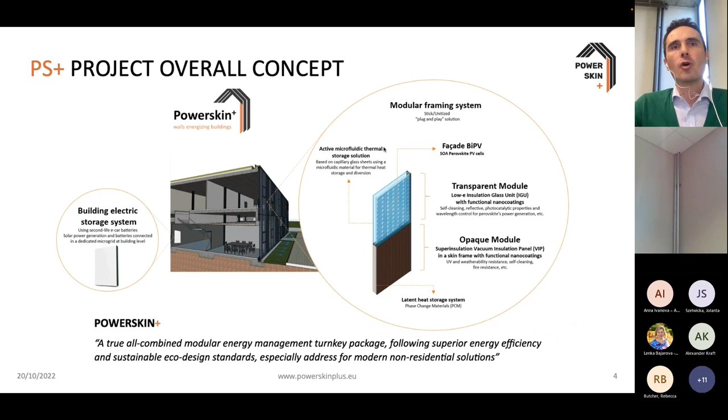This is a sketch that I normally present when I want to let people know what we are doing in POWERSKIN. So basically, we are working with curtain wall facade systems, and we are developing these different transparent and opaque modules and mixing them with what we call add-ons if we want to have a superior efficiency or a superior energy saving solution. So we want to be an all combined modular energy management package towards energy efficiency, but we are also trying to tackle those issues with sustainable eco design standards, especially addressing non-residential solutions, but actually this can be tailor-made for other types of buildings, including residential ones.

So the main key objectives of the project. We are trying to generate these hybrid enabled systems with multifunctional add-on features for curtain wall solutions. And one of the biggest objectives of the project is to demonstrate this holistic facade solution in an operational environment, which is actually what we are starting to do right now, trying to pave the early paths for future exploitation of the project outcomes. So we are trying to provide the retrofit market with this highly adaptive multi-case energy efficiency and management system. But also we are looking quite sharply at new buildings as well.

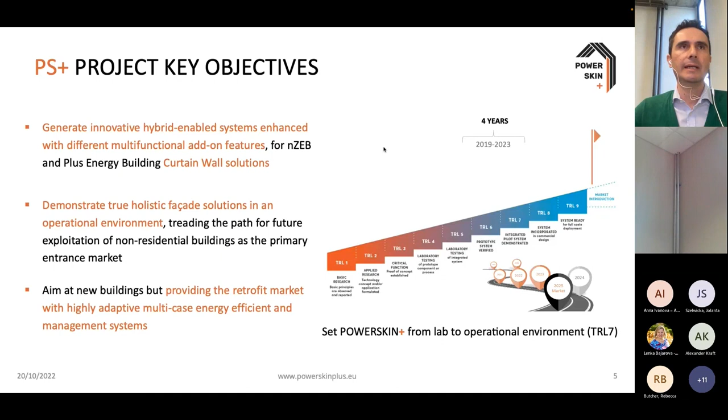So basically, we want to take POWERSKIN from lab to operational environment. So at the end of the project, we will finish most of our developments at TRL7, although there are already some modules and some elements that are already in the market. So some are very close to the market and others already in the market.

The project methodology. So this is a very typical slide of the different work packages of the project. Basically, we are trying to develop different KETs, key enabling technologies, all mixed in a piloting program. So we are dealing with super insulation elements. For the transparent elements, we are working with IGUs, and for the opaque systems, we are working with vacuum insulated panels as the main insulation element of our modules. We are also combining this with nano-enabled coatings, with active and passive phase change material heat storage elements, and microfluidic thermal storage materials for the transparent units.

And we are also combining our systems with solar energy harvesting components based on perovskite solar cells, both for the semi-transparent and opaque modules. And in the end, trying to get the maximum performance out of these energy harvesting solutions with the help of electrical building management systems supported by second life lithium-ion batteries, recycled batteries coming from electrical vehicles.

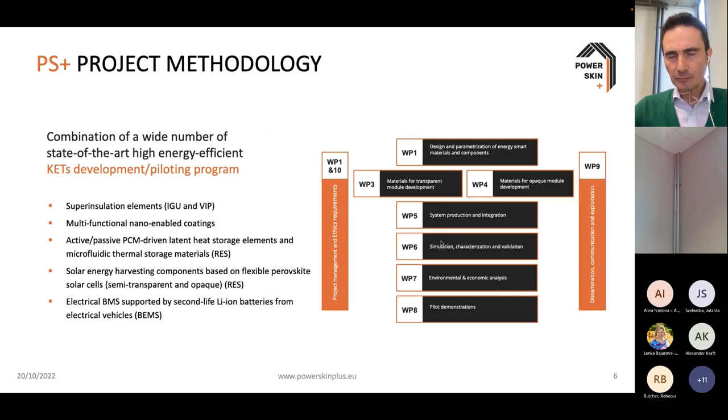So as Maria told about PLURAL, we also have a work package dedicated to system production and manufacturing, and how to integrate these different opaque and transparent elements in a framing facade system. We worked in different work packages for the transparent and for the opaque, and then we integrate all of these elements and add-ons in production, and after simulation, characterization, and validation, and the environmental and economic analysis, we intend to do what we are doing right now, which is starting our pilot demonstration of the solutions that we are tackling. So just to provide you a notion of what our transparent modules and add-ons are.

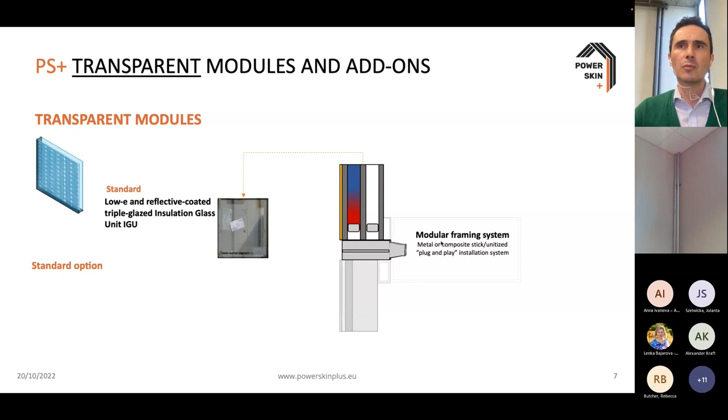So basically, POWERSKIN starts with the standard option. The most economic option will be the standard one. It's a typical triple glazed insulation glass unit, IGU, that we designed to work in a typical modular framing system, either a metal or a composite framing system, which can be a stick or a unitized plug-and-play installation system. This is the standard, so the minimum required for any type of energy efficiency.

In the premium options, we start including layers of different solutions that can enhance the performance of the facade of the building. We call this the premium option, so basically, we use functional nano coatings on these triple glazed insulation glass units for self-cleaning, anti-reflective, also for photocatalytic properties, and wavelength control for PV power generation, which I will talk about a little bit later on.

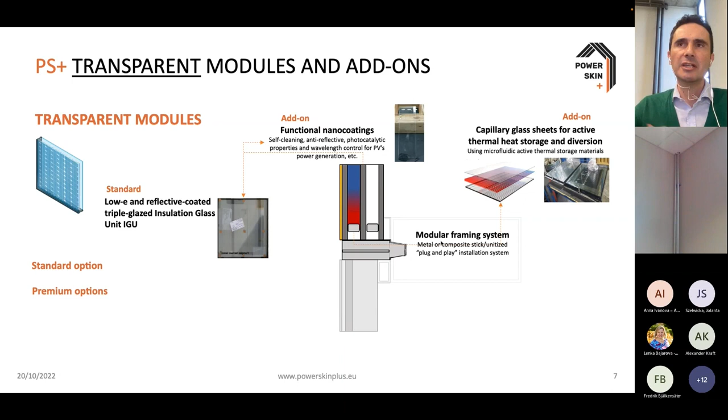Then we also have an add-on that was developed by some partners of POWERSKIN, derived from a previous European project, which are these capillary glass sheets for active thermal heat storage and diversion using microfluidic active thermal storage material. So basically, this is a fluid that is pumped inside these thin channels in the glass pane in the triple glazed IGU that removes heat and recovers this heat, for instance, to be used in the heat recovery system of the building.

Then we also work with facade building integrated photovoltaic cells. We are not using silicon ones. We are working with perovskite PVs with the help of a partner of POWERSKIN, which is Saule Technologies. And we are developing both semi-transparent and opaque perovskite PV cells to be integrated in our modules.

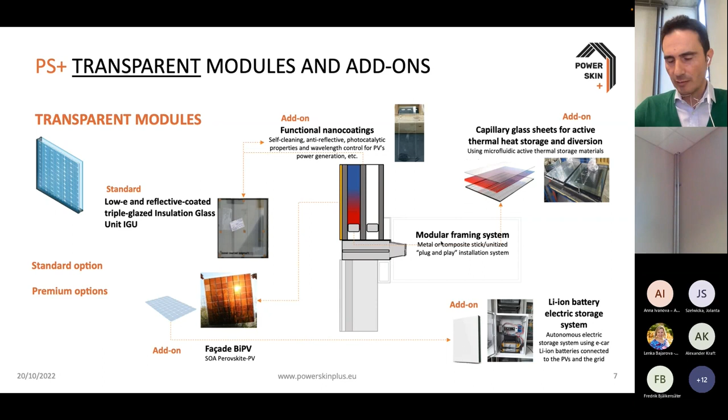As I told you before, we link this facade building integrated photovoltaics and the energy harvesting that we can generate from them. We can store it in our lithium-ion battery electric storage system using recycled batteries coming from electric vehicles. This battery system is being developed by a University of Warsaw.

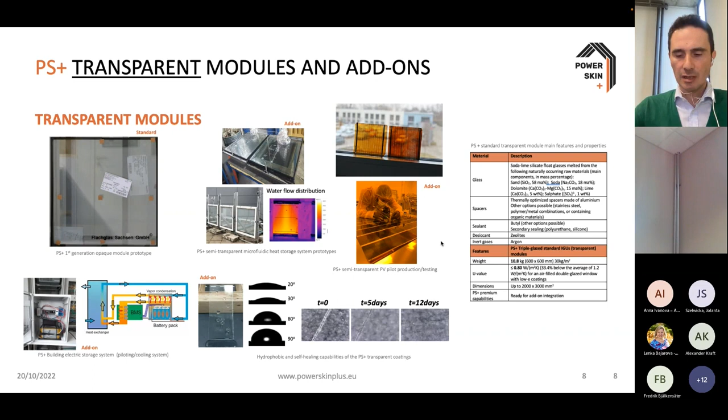Some examples of our modules being prototyped and tested in the lab, just to give some notion. Basically, we are already running some tests on test cells in Italy, at Polytechnic Torino, and we are starting to take these tests to real buildings, making installations in real buildings starting this autumn. On the top pictures, you can see some examples of the perovskite semi-transparent cells. You can see that you can actually see through them. And this is quite an achievement that Saule Technologies is getting for the project.

Regarding the opaque modules and add-ons, we start with the standard option, which is basically some opaque panels with a front skin and a back skin that can be glass, composite, or metal, and the core body of these opaque modules is a super insulation made of vacuum insulated panels. Actually, this is work of Instituto Pedro Nunes, where I am from. And this is part of our developments.

So basically, we are trying to develop new vacuum insulated panels with enhanced core systems and alternative core systems. We are getting 2 patents out of our core solutions developed inside the project. And we can use these opaque modules again in the same modular framing system, as stick or unitized plug-and-play installation. Then we've got the same premium option as we have for the transparent solutions and transparent elements. Again, functional nano coatings for UV weatherability, fire resistance of the skin panels, for instance.

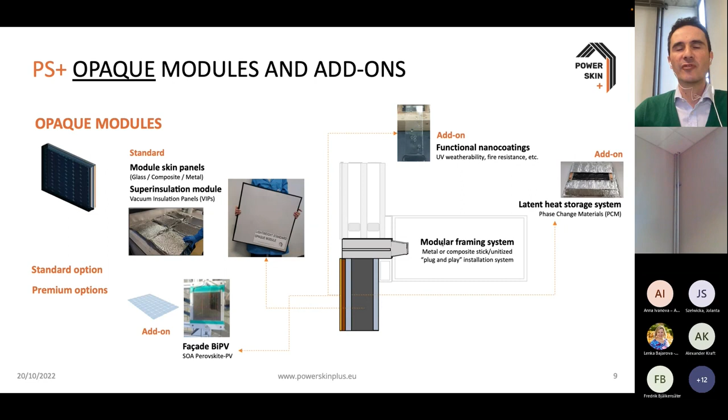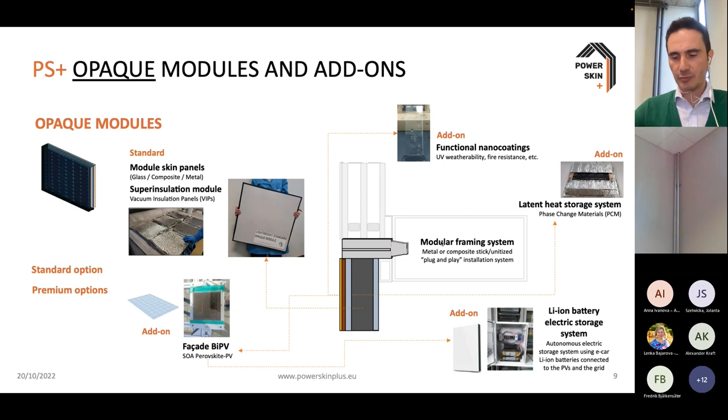We are working also with latent heat storage systems using phase change materials, not only for this heat storage solution, but also to enhance the performance of the add-on coming from the perovskite solar cells, to increase the service life of these PV solutions, preventing them from getting too much heat during the summertime, and also link the same PV cells to this electric storage system as in the transparent elements and modules.

These are some of our developments for the opaque modules, where you can see the VIP solutions that IPN developed. We created a pilot production testing here at the institute for the project. You can see the interior of the premium option, having the PCMs included in the module, and we also work with some heating foils to activate the PCM.

You can see also the opaque flexible perovskite PV prototypes in the middle figures, and some of the batteries, the lithium-ion recycled batteries that the University of Warsaw is developing for the project.

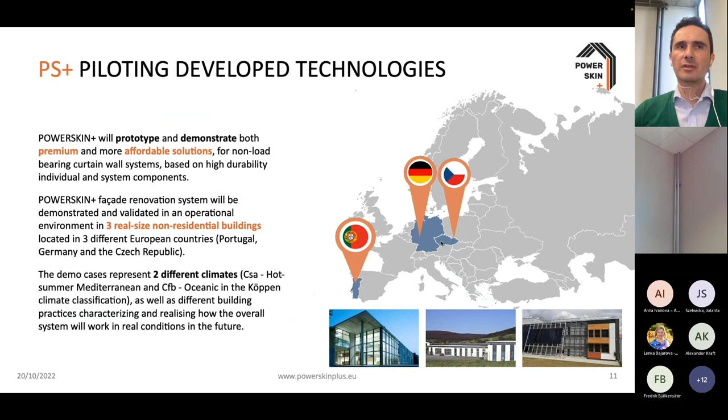We have 3 demos, 3 real buildings, to prototype and demonstrate our solutions. One will be here at IPN campus, and the other two will be in Germany and the Czech Republic. The Germany building is the building of one of our partners, Flachglas Company, and the Czech Republic building is in the campus of the Polytechnic of Prague, CVUT, representing different types of non-residential buildings and different types of climates.

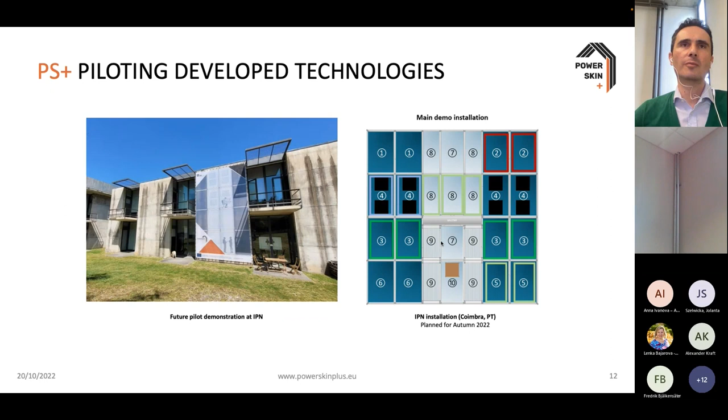This is the pilot installation that we are going to get in IPN campus. We are starting within 15 days to make this installation for POWERSKIN in one of our facade buildings.

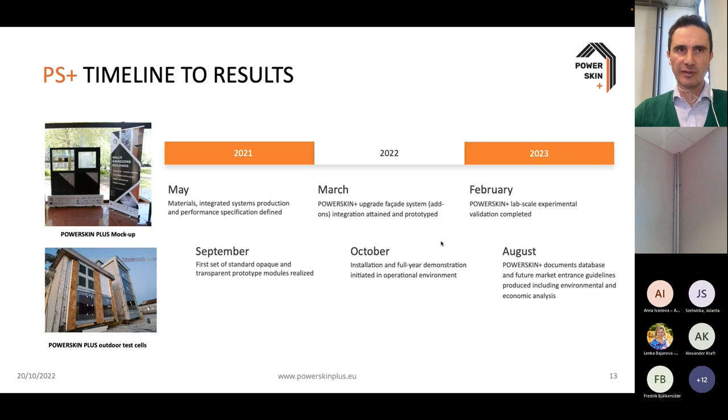The timeline for our results: right now we are making this installation to get the full year demonstration in operational environment for our systems. And next year we want to have the full lab scale experimental validation completed, and all the document database and future market entering guidelines to prove the efficiency of our solutions, including environmental and economical analysis.